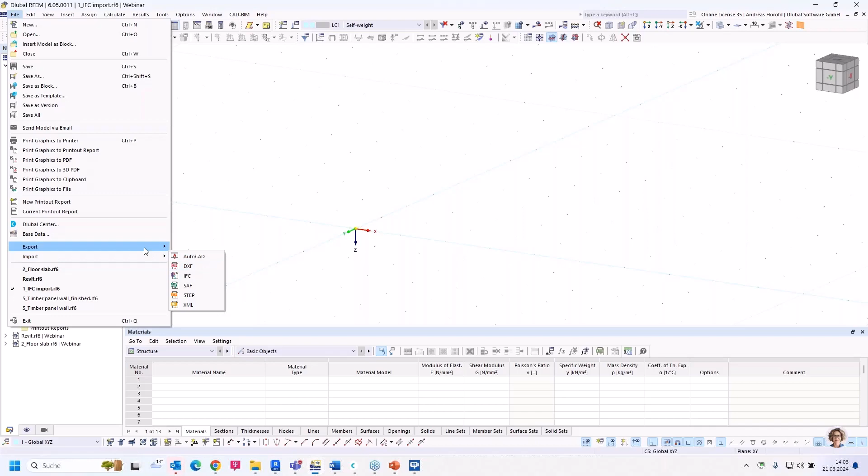Let's turn to RFEM with an empty model. The first question is: how can I export or import an IFC file in RFEM 6 or RSTAB 9? You can do that via File, then Export, where you can see IFC and other interfaces, and similarly File, then Import, also with IFC and other interfaces. Version 4 is supported for both import and export, while the older version 2x3 only works for importing. Regardless of which direction you exchange data, the structural analysis view, the reference view, and the coordination view can all be processed. So let's import an IFC file.

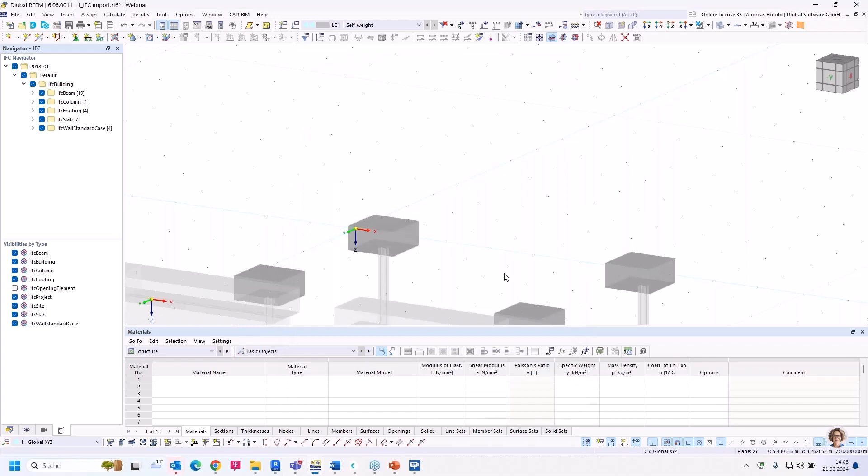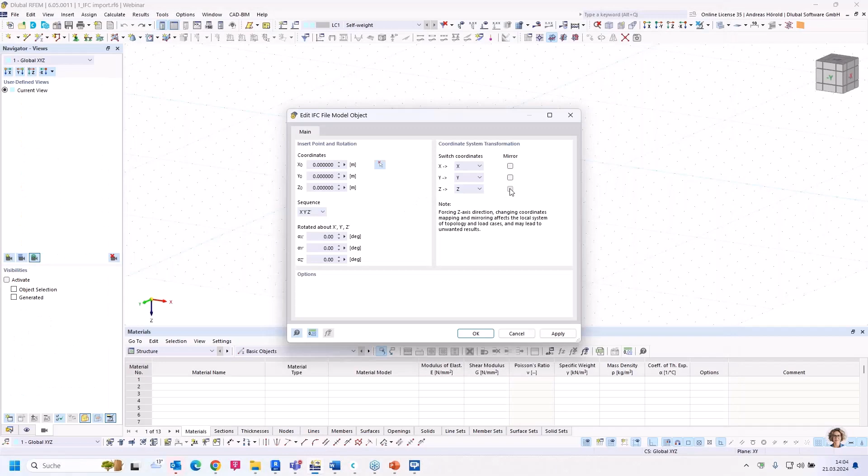So that file. You can choose any coordinates where you'd like to import it, then press OK. You see the import worked, but the z-axis direction was opposite to the CAD model, so let's import again via File, Import, IFC, and this time mirror the z-axis. Okay, that looks much better. Now imagine we have to design the steel construction.

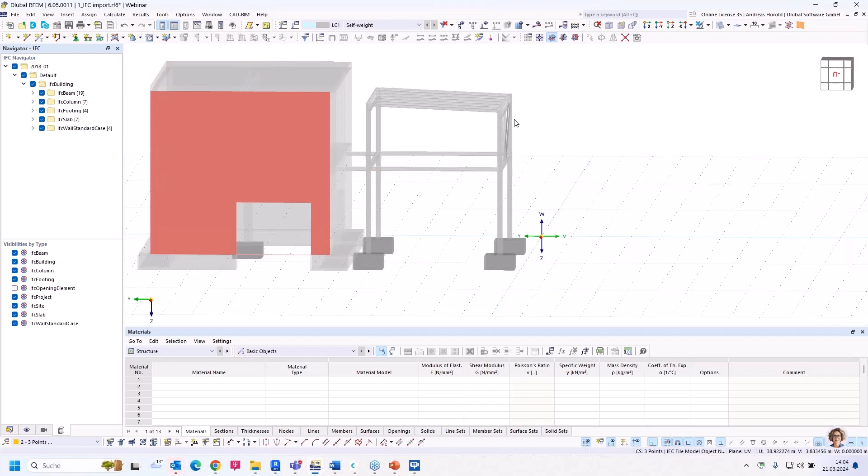We ignore the building here, the concrete structure, and prepare the model for the design. At the moment it's only an IFC model object, so we have to check the CAD-BIM conversion tables. The steel material has to be assigned with the material from the database in RFEM 6, and also the sections — you can see the different cross sections. Most of them I already assigned, matching the correct RFEM section from the library. The concrete items are not of interest for us in this example.

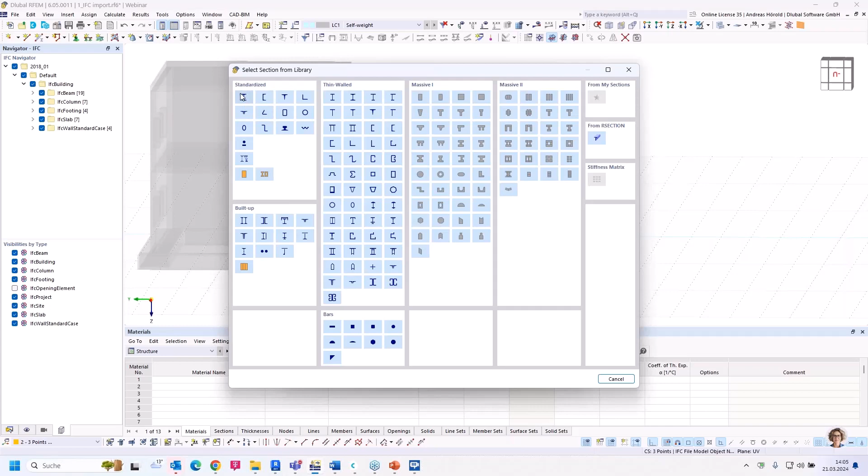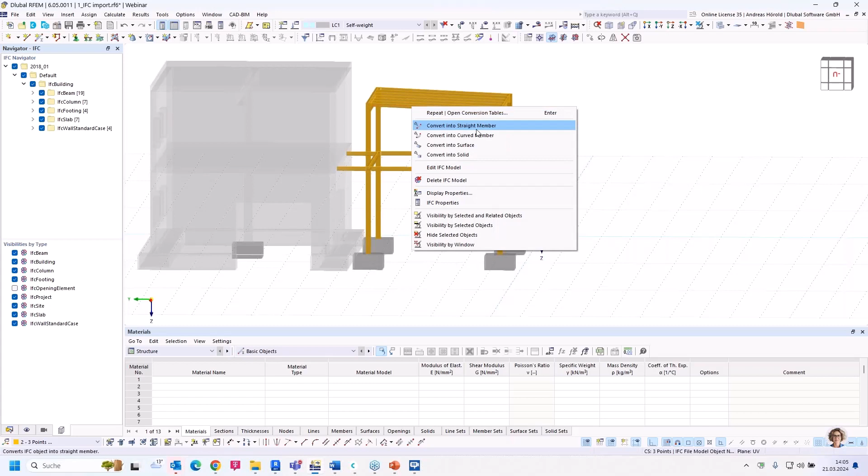Let's assign the HEA 160 from the CAD program — that's a standardized profile. So, HEA 160. Now the list is complete. What we have to do now is select all, and with a right click, convert the whole construction into straight members.

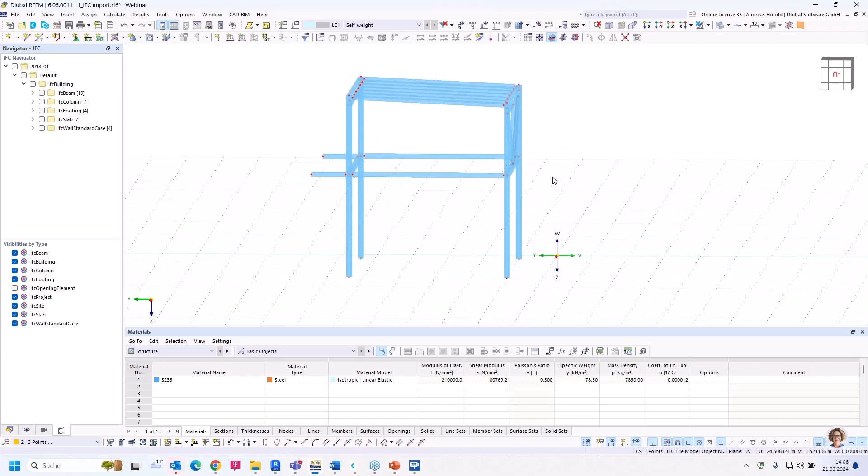Let's disable the other IFC objects here in the navigator on the left side. Now there's only the steel construction, which looks quite good, but only in the transparent or solid model. When we take a closer look in the wireframe model, you can see the members are not connected to each other. Let's turn back to the solid model.

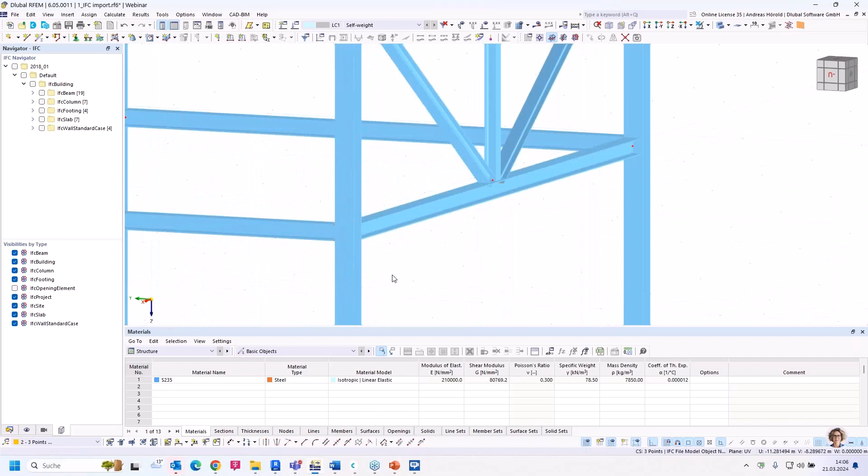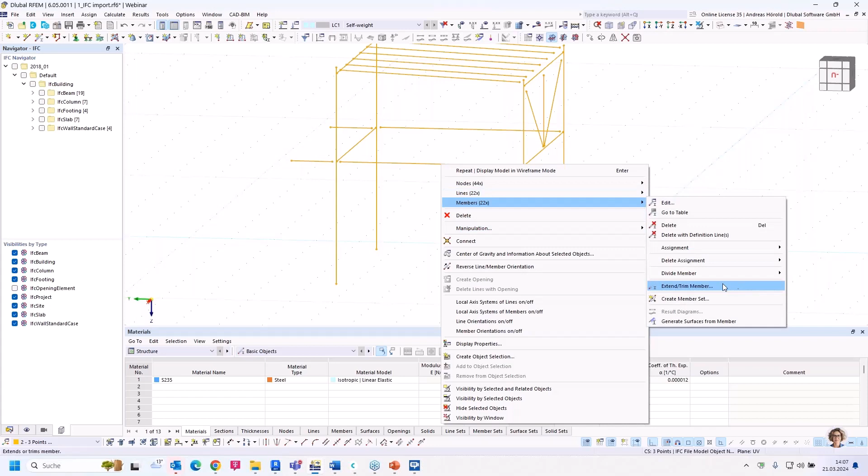In the CAD model, the horizontal beam here is connected with the flange of the column, and so on, but we need the axis of the members, and they need to be connected. Let's turn back to the wireframe model. There's a function in RFEM 6 for correcting such things: I select all, and with a right click, modify the members using the feature Extend/Trim Member. Let's do that — we would like to extend them to the next member or line on both sides.

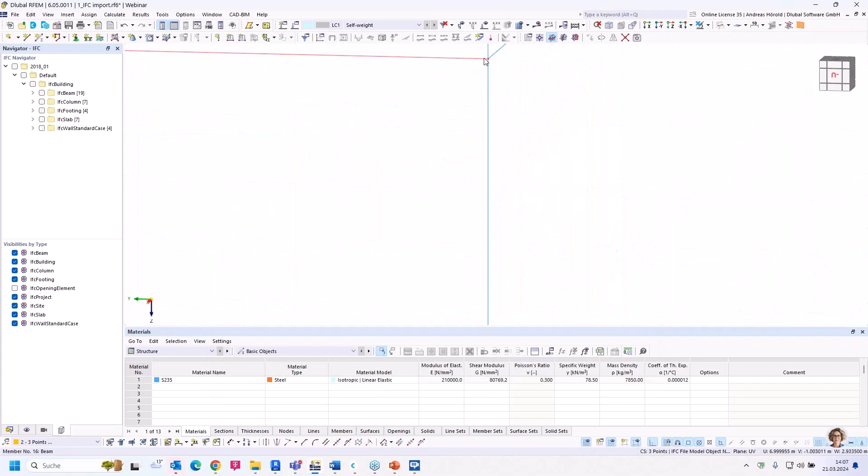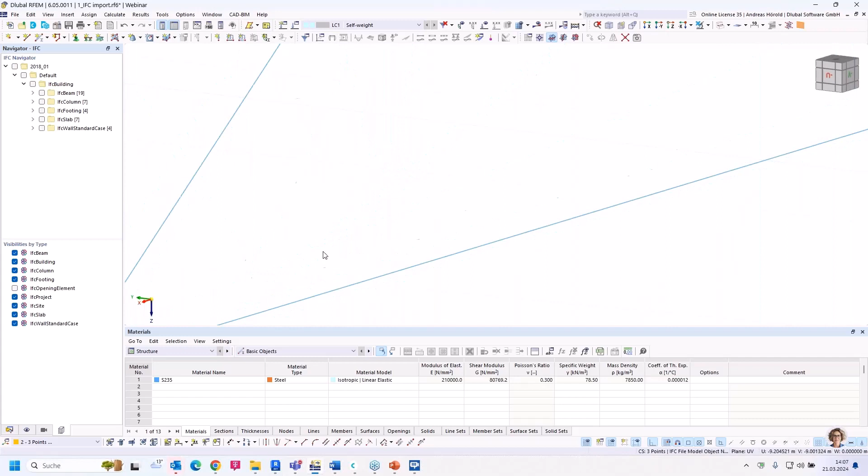Okay, that looks already quite good, at least at this node and the other nodes. But you can see the purlins are not yet connected because we have an offset, though we will correct it. In that case, for the bracings here, we have to do that manually, for example with drag and drop. So here the same.

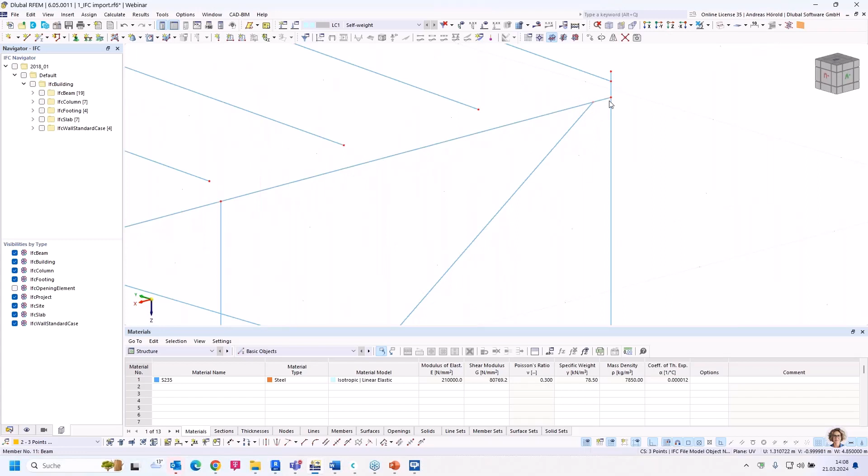Also on this side. Okay, so now we come to the purlins.

I use this function to connect the members or divide them with a node, so I can, for example, delete such a member. But in the first step, we move the roof members to this node with the move copy function, using a vector from this node to this node.

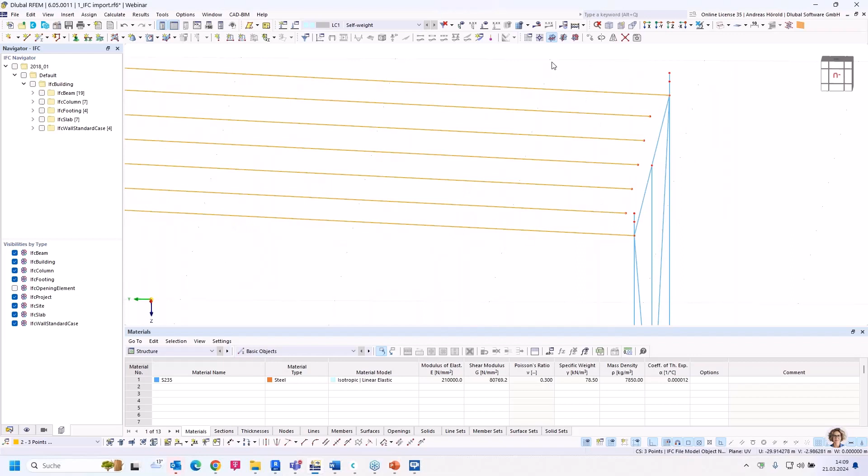Okay, so let's turn to the -y view. I delete these parts of the columns. Also this one.

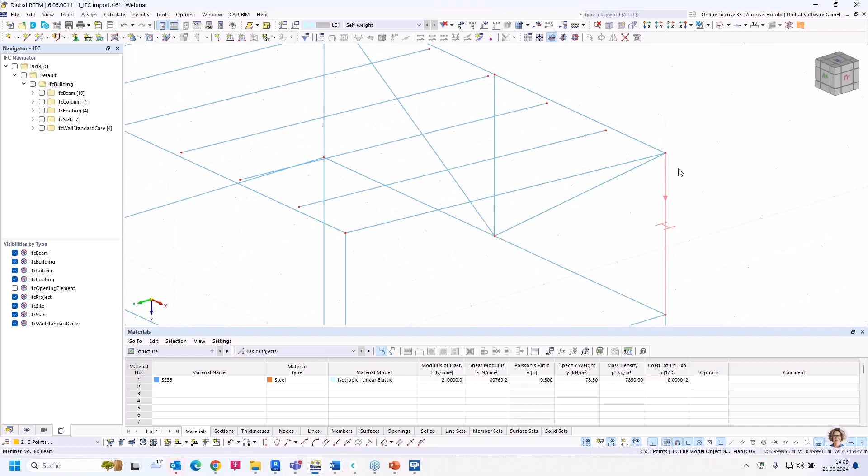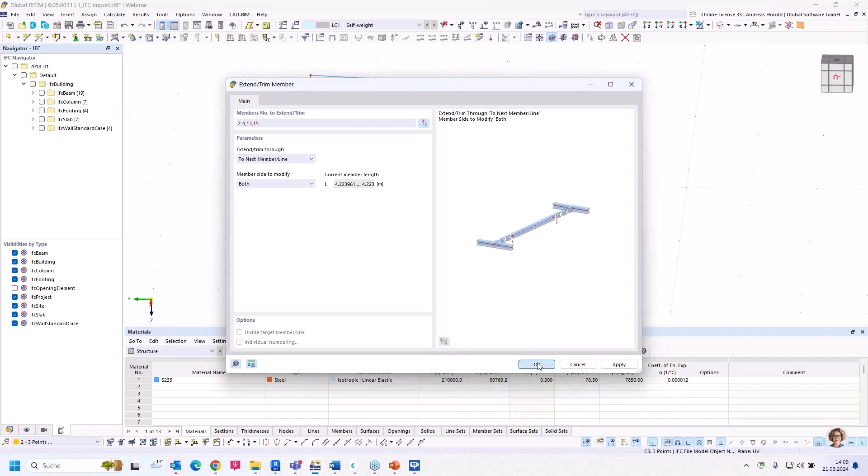So now I need to extend the purlins. I select them, then with a right click, I turn to the already shown feature, extend trim member, to next member line on both sides. Okay, that looks already quite good.

In the first step, I would like to change the bracings here, with a double click, for example, from beam to truss.

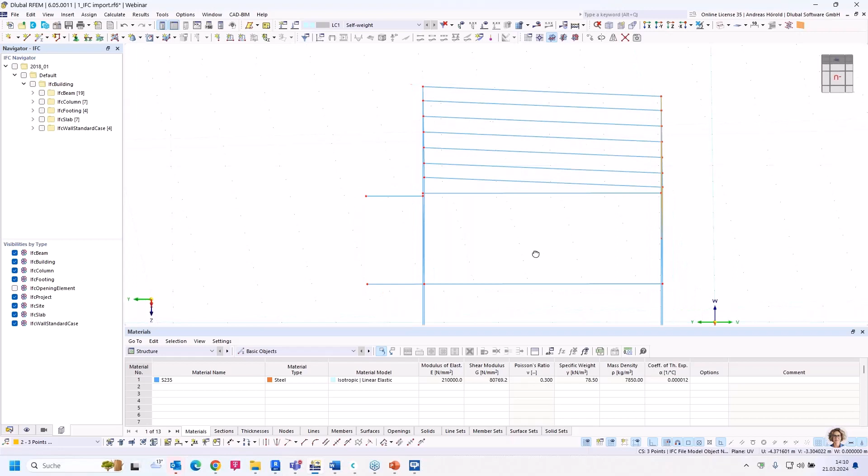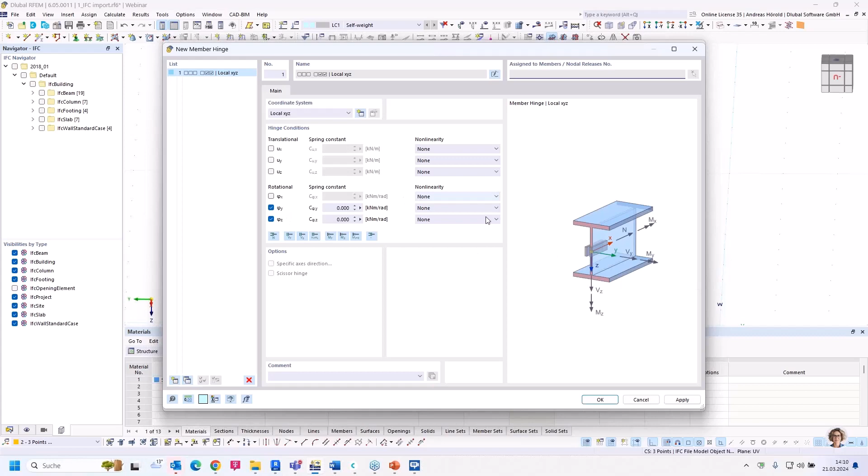So I change the purlins, or I add hinges. With a double click, hinges, I go to the table hinges and create new hinges around the Y and Z axis of the member, a typical moment hinge on both sides.

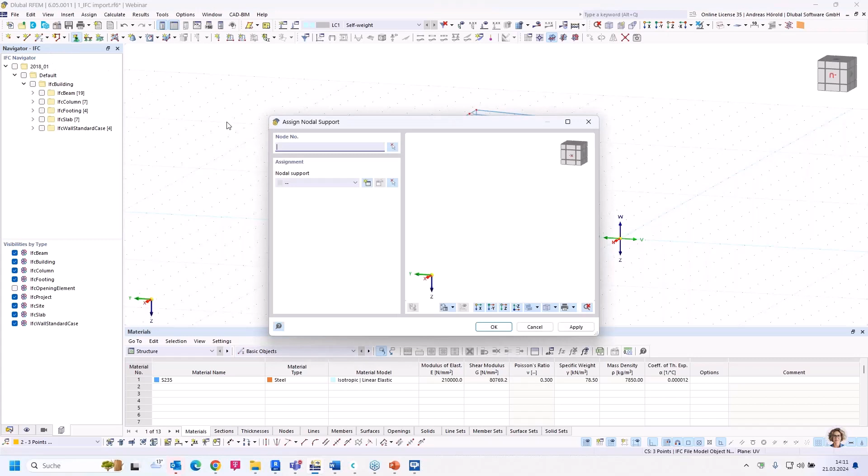Then we need to add supports. So I add supports here, left above, a nodal support in all directions and around the Z axis.

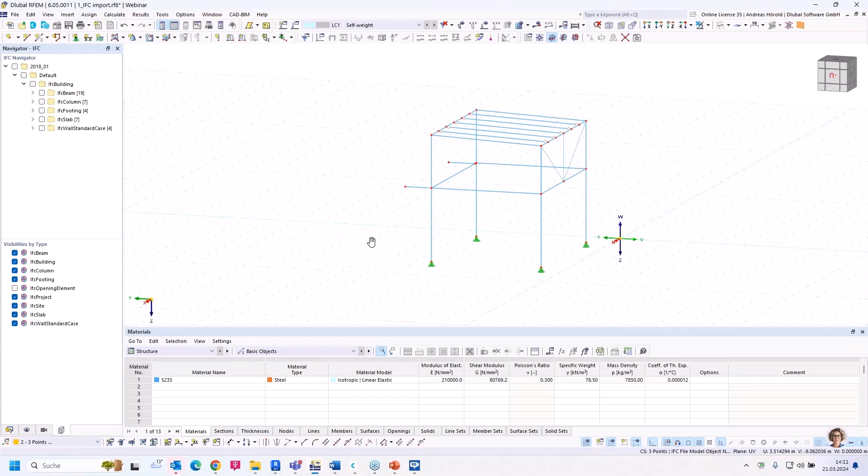And the columns are supported now. And we create also supports on the concrete wall here, so a new nodal support in all directions and around the y-axis.

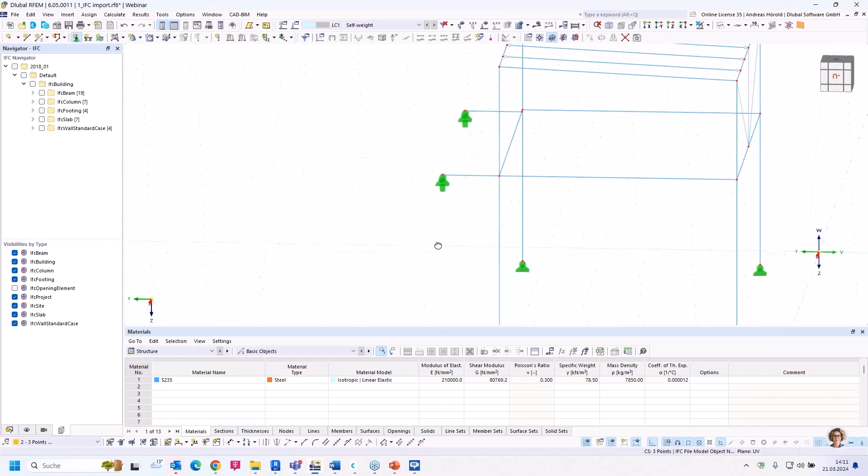Okay, yeah, that should be all. The model is now corrected or modified. We can go to the tools and do a plausibility check.

All is okay, and let's calculate the self-weight load case. Okay, we get results, that means all is connected correctly. And the model can be used, we can assign other loads, snow and so on, and wind, and calculate the structure.

Now you can see it's quite complex to modify such an imported model. It depends how good the model is created in the CAD program. Now there are other possibilities, for example with the direct interfaces from RFEM to Tekla Structures, or to Revit, or from Revit to RFEM.

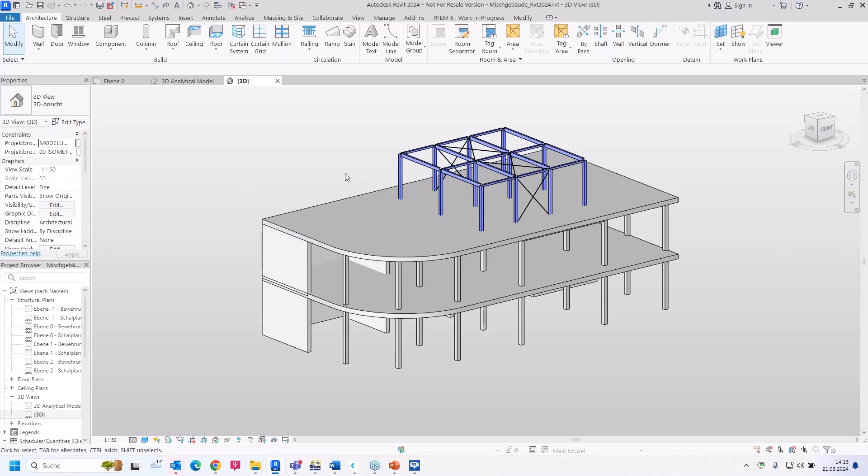Let's show that. I turn to Revit, and if you create a physical model and in parallel an analytical model, you can also create supports and so on. And if you export such a model, you don't need to modify so much as I showed for the IFC model.

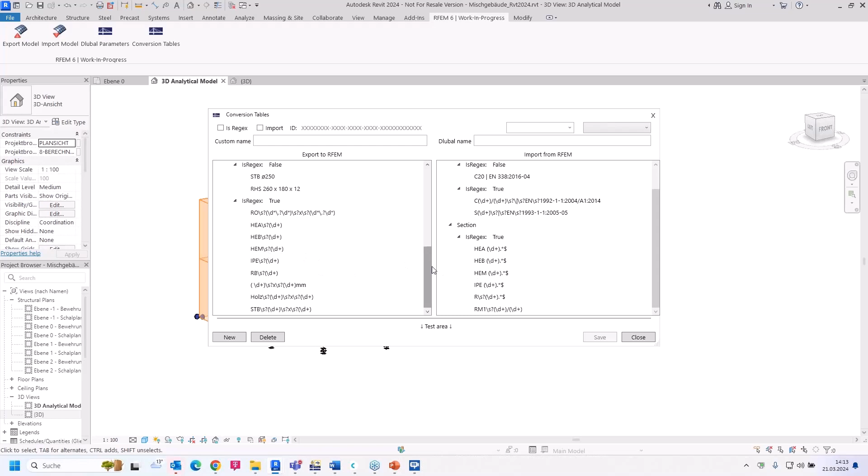Let's do that. We turn to RFEM, the RFEM tab here, or dialog. There are conversion tables, you can also add different cross sections that need to be transferred, and then you can go to the export. You can select if the Z direction is upwards or downwards. You can override the existing structure and so on.

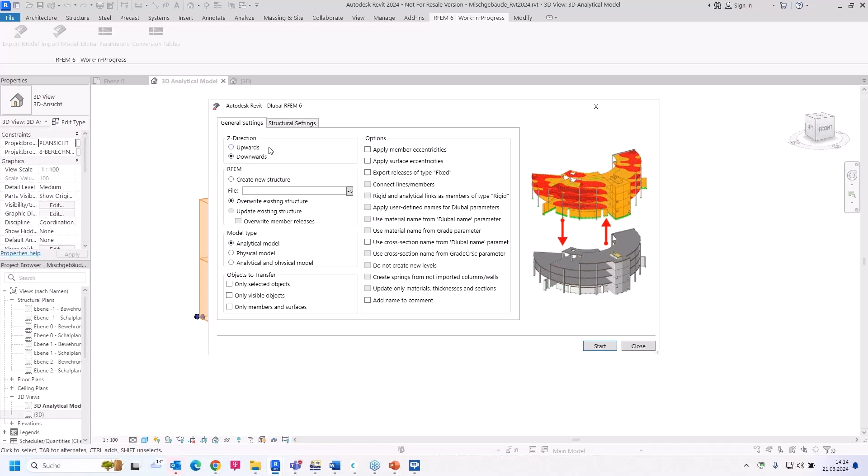You can transfer the analytical model, physical model. You can do structural settings. You can transfer nodal and line supports and so on. I need to go back to RFEM and go to an empty model. It's an empty model, so now I start the transfer.

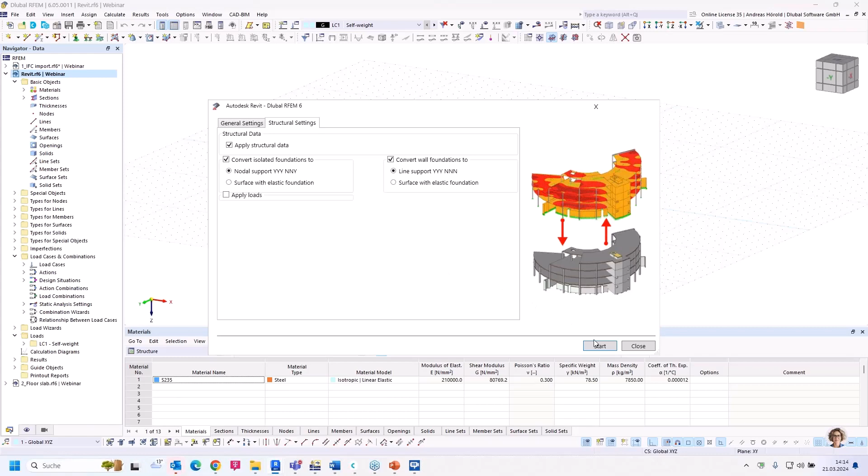Start, okay, now that takes only some seconds. We go back to RFEM, and now you can see the transferred model. That looks quite better. We can turn to the wireframe model. All members are connected and so on.

So let's calculate the model. I create a static analysis setting and calculate the load case, self-weight in that case.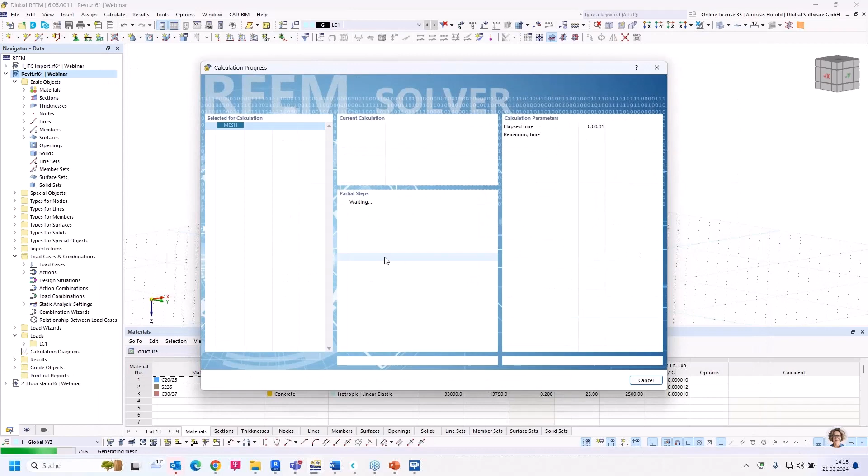So the same workflow is in Tekla, the input is analogous. And as I already said, the better the model is prepared in the CAD program, the less additional work in RFEM is necessary.

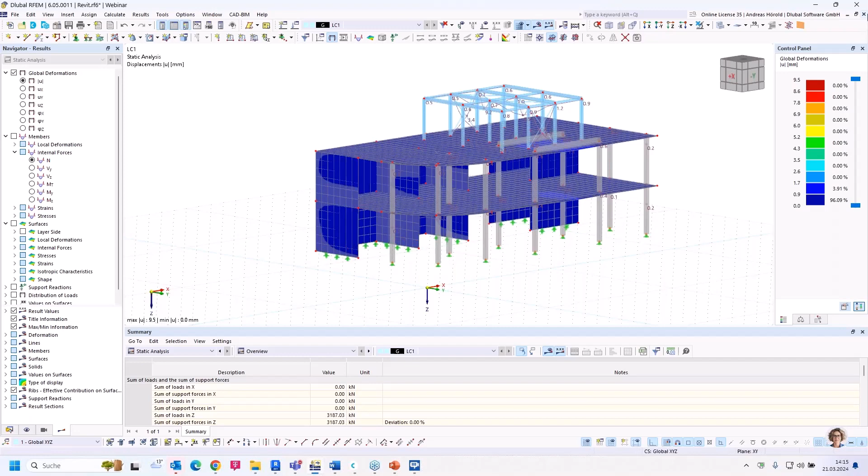Okay, so I close that model, and I save this model. And we turn to the next question.

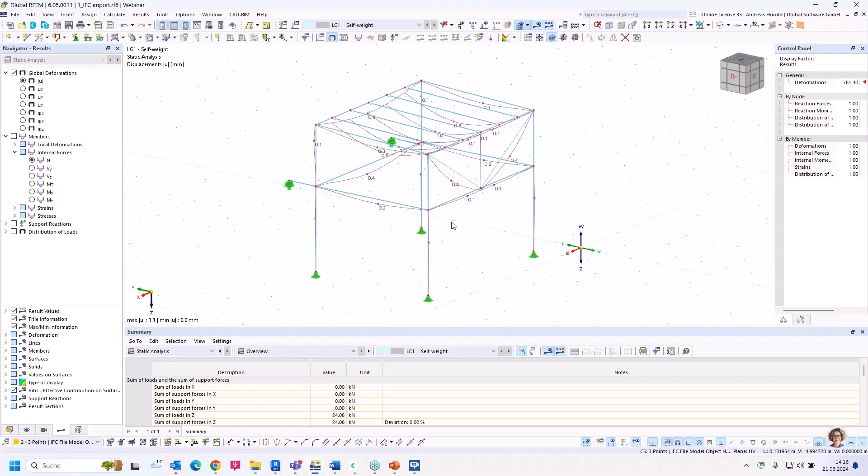The next question is, can I transfer a support load to any location in the target model without defining a node here? Yeah, that is possible. I would like to show you how to do that.

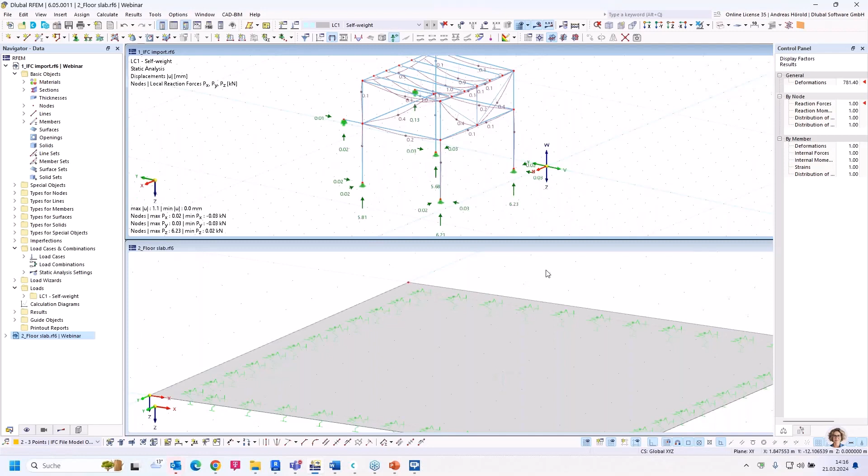I open also the floor slab, or I show both windows. We would like to transfer the support reactions to this floor slab.

Let me switch off the user-defined coordinate system from the CAD model. You can see the steel structure is in the positive Y direction and the floor slab is in the negative Y direction. For the feature I would like to show you, that doesn't matter. Let me rotate it a little bit.

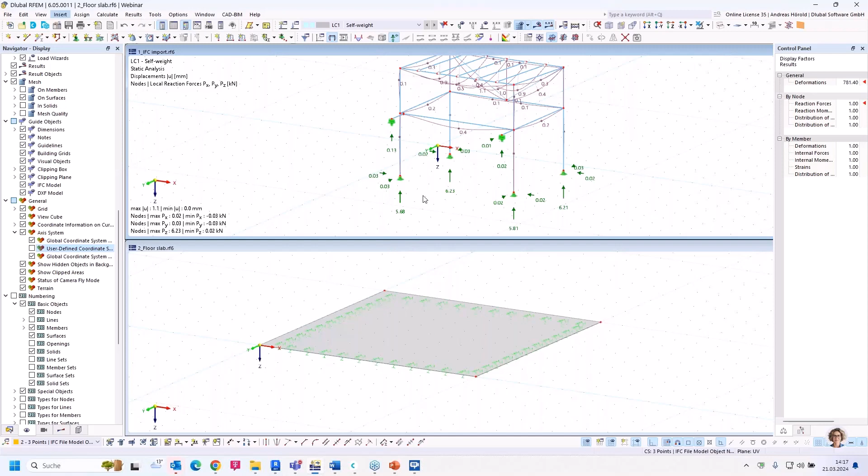We would like to transfer those 4 support reactions to any place of the floor slab. How to do that? We turn left above to insert, but first I must show the numbering of the nodes. That's quite important, and I also add dimensions in the structure.

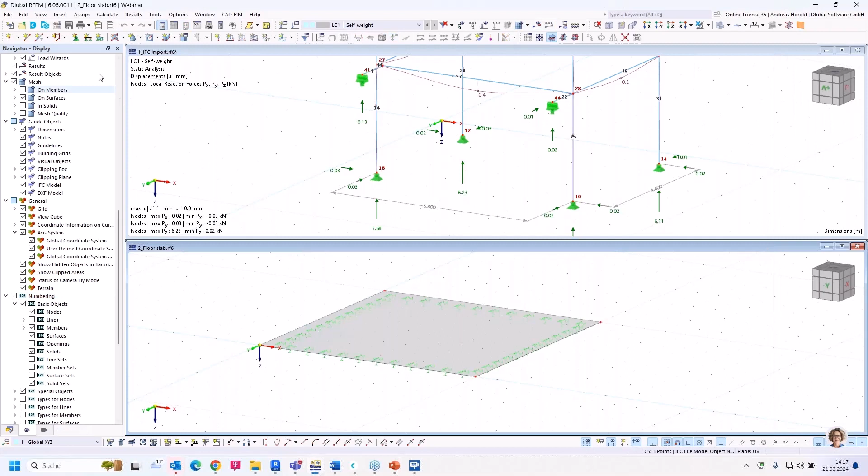So 5.8 meters in X direction and 4.4 meters in Y direction. Then we turn to the floor slab, then insert loads, free concentrated loads.

The feature I show you will be released shortly for free line loads as well. I showed it for the free concentrated loads. I have to select import support reaction, and with this button I define the location of the loads.

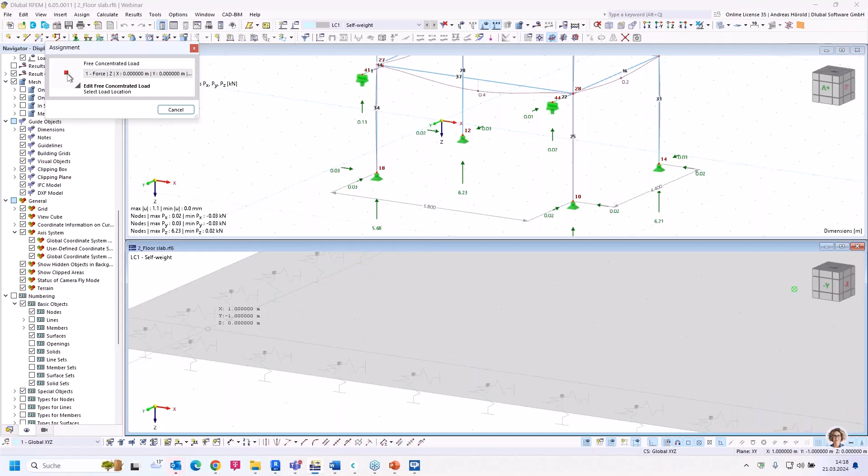So let me select the point, for example this point. I have to define or select the node number. That's the model name, IFC import.

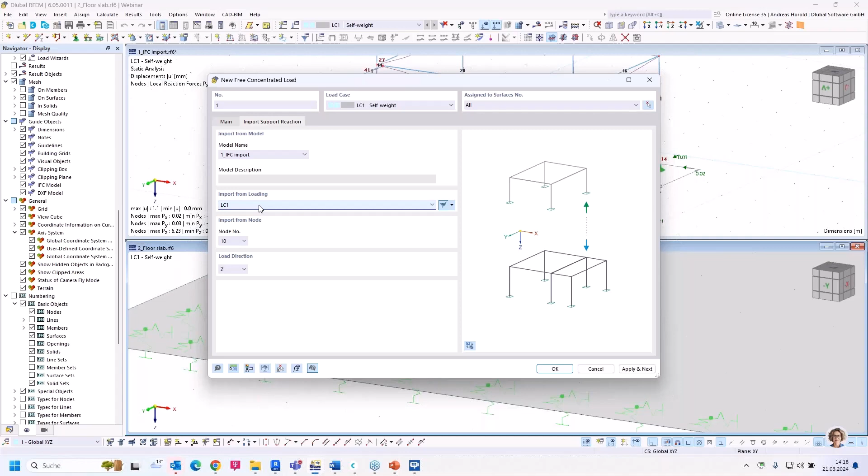It must be in the same folder as the target model. So here you can select the load case and the node. That's node 18. And set direction. That's all for one support reaction.

We need to copy that load, 5.8 meters in X direction. Copy. Okay, and then both loads in Y direction, 0 and minus 4.4.

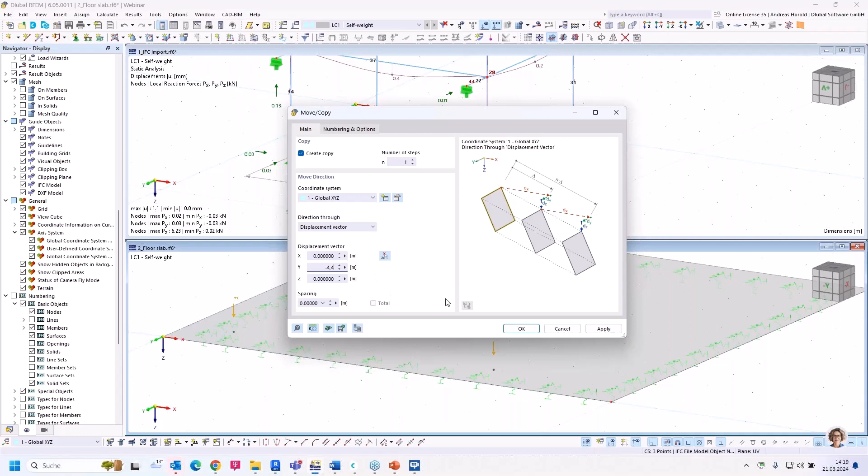Now we have to assign the nodes, node number 10. This one, node number 14. And for this one, node number 12.

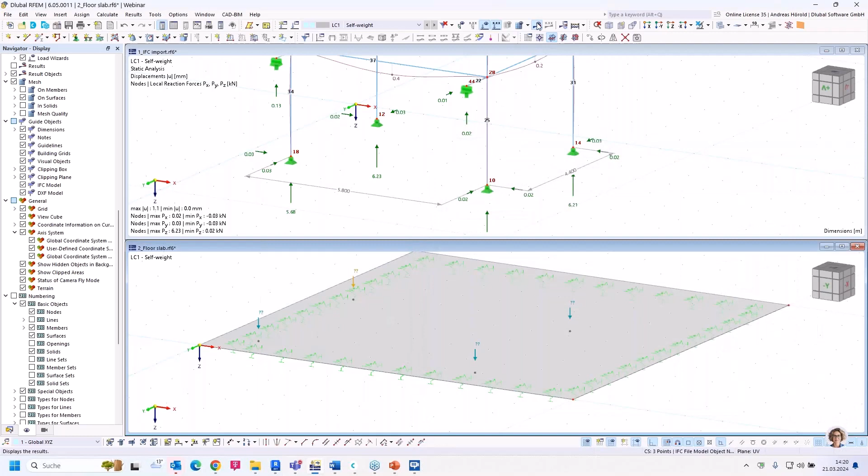So then we need to calculate the load case, and the loads were transferred from the original model to the target model. Takes some seconds.

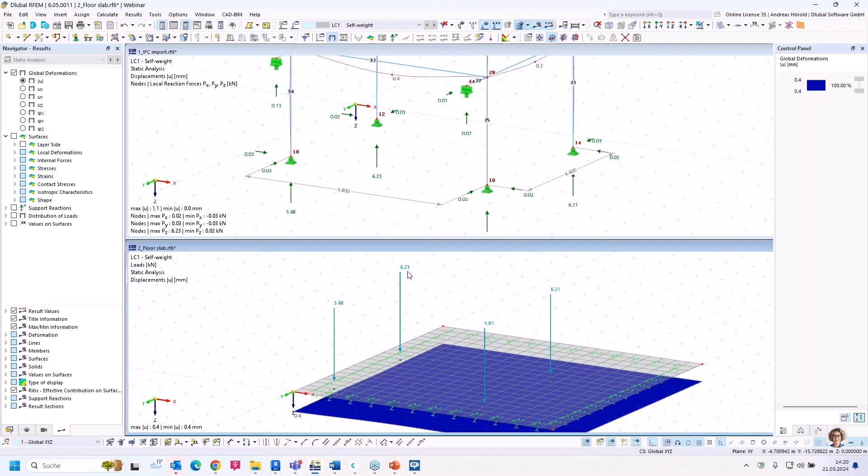Okay, so now let's compare the values. 5.68, 5.68, 6.23, and so on. It matches for all 4 loads.

That's also a little bit complex, but you are absolutely free on the locations in the target models. The other feature I already showed in a previous webinar is insert load wizard, import support reactions, load wizard. With this dialog, you can transfer all supported nodes to the target model.

At the moment, you have to select the single nodes in the target model, but we will implement a feature so you don't need to select any single node. The program should detect where the different supported nodes are, or where the loads from those nodes are transferred into the target model. That's our future plan to improve that feature.

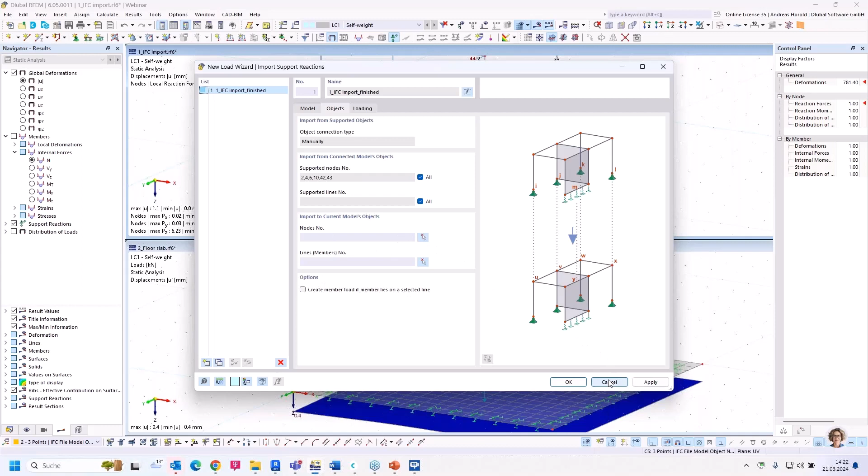Okay, then we turn to the next question. I open the next model. The next question is: are offset moments that occur when notching cross-sections considered in the design? Yeah, the answer is yes.

I would like to show you that on an example. You can see 2 single-span beams. I turn to the solid model, and you can see notches here at the start and end point.

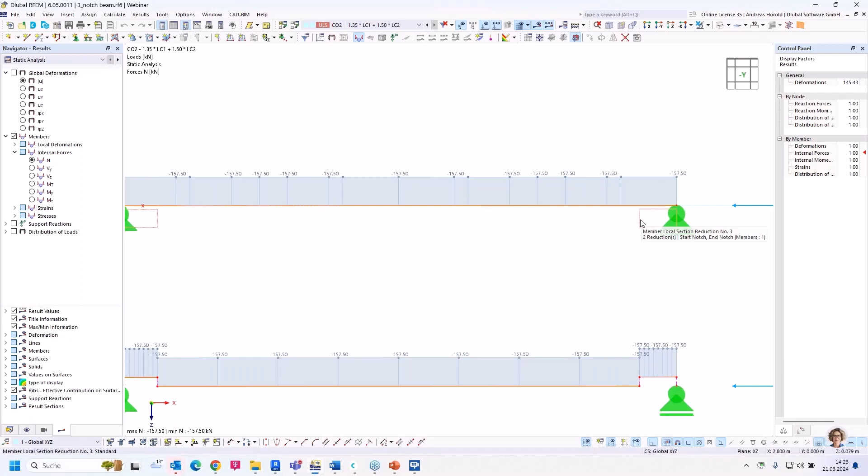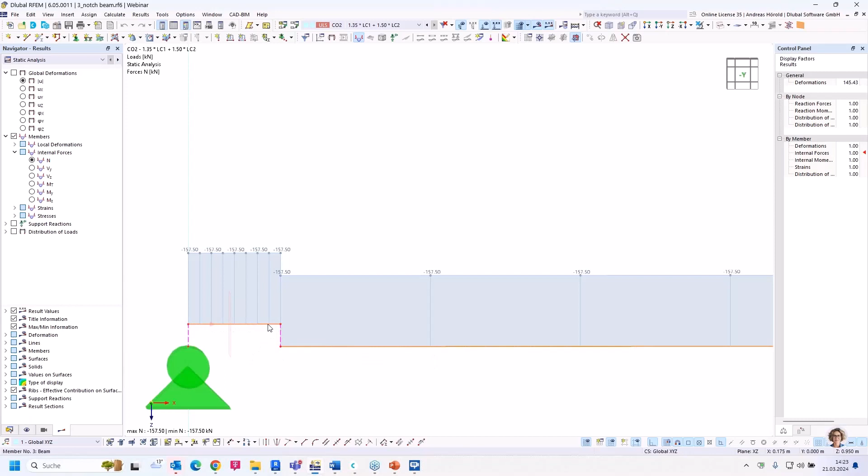For the upper model, I defined that with a design property, and for this one I created different cross sections. Cross section with a height of 140 millimeters, and on this place 240 millimeters, and that's the notch. The axis of the member is higher than this one without the notch.

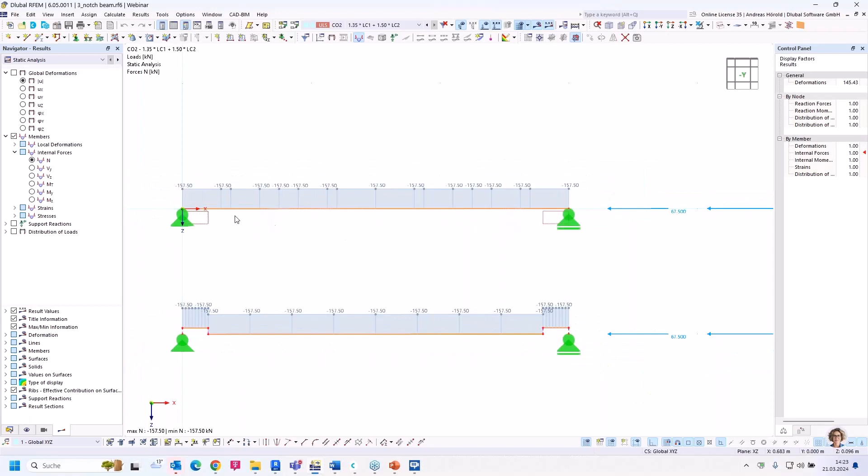You can see the internal forces are the same in both models, at least the normal forces. But for the MY internal forces, you can see there's an offset moment in this model, but not in the upper model.

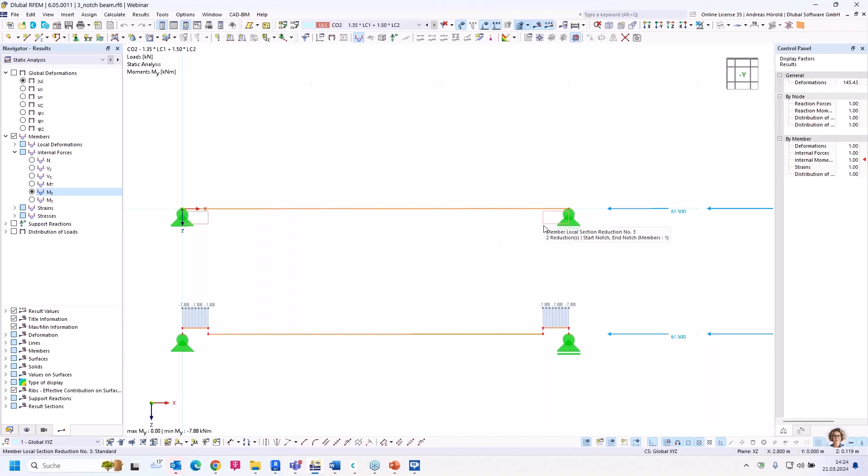But I created design properties for this member, and later it will be considered in the design, this offset moment. So I show you the properties of the member with a double click, go to the design types, and you can see where our local section reductions are created.

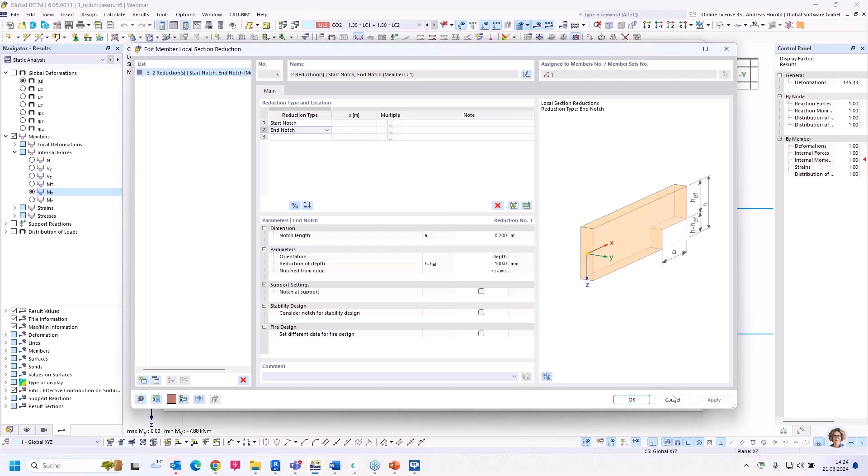So at the start, we have such a notch with a length of 20 centimeters and a depth of 100 millimeters, and the same at the end of the member. I simulated the same notch with this model.

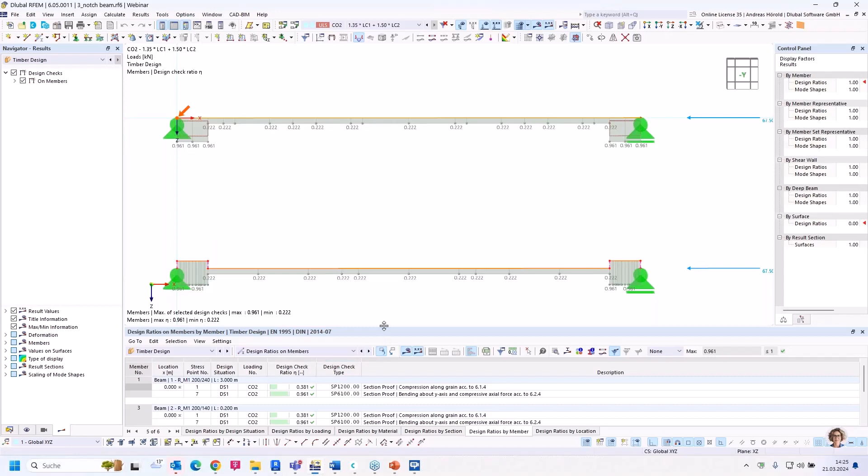Those are rigid members. Let's go to the design, to the timber design. So I go to the design ratio by member. You can see all the design ratios are the same in both models.

0.22, 0.22, and at the end and at the start

Okay, that's member number 1 in the table. I double click on that line.

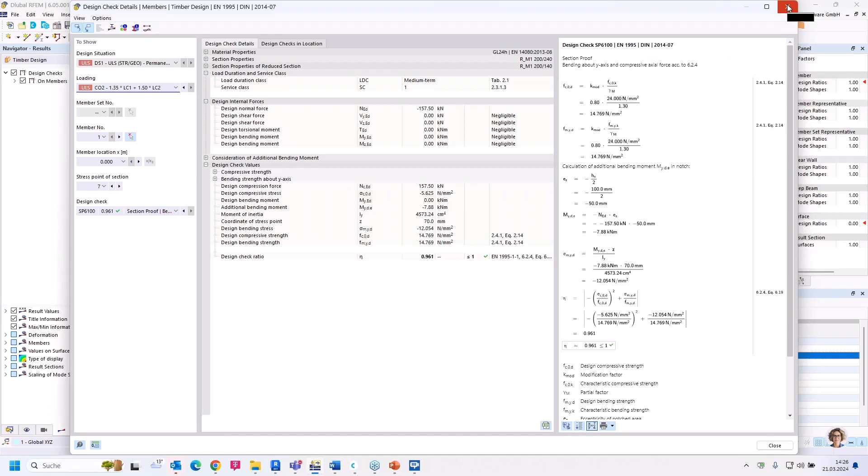You can see in the design checks that the calculation of additional bending moment is considered, the normal force with the eccentricity because of the notch. That's the answer to the question: yes, the offset moments were considered in the design.

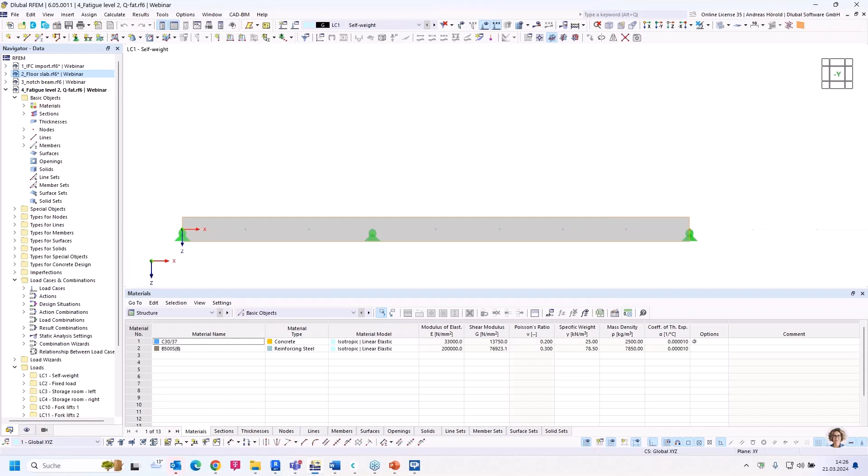Okay, then we turn to the next model and the next question: how do I consider the Q-FAT value for level 2 fatigue design for concrete components?

That's a simple model, a 2-field concrete beam with different load cases: self-weight, fixed load, storage room load left and right, and forklift loads on different places. We simulated such a moving load. Let's turn to the load cases and combinations.

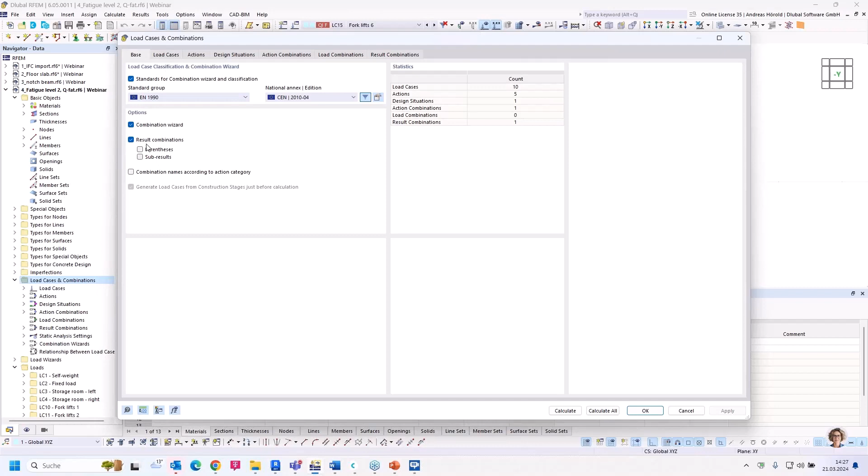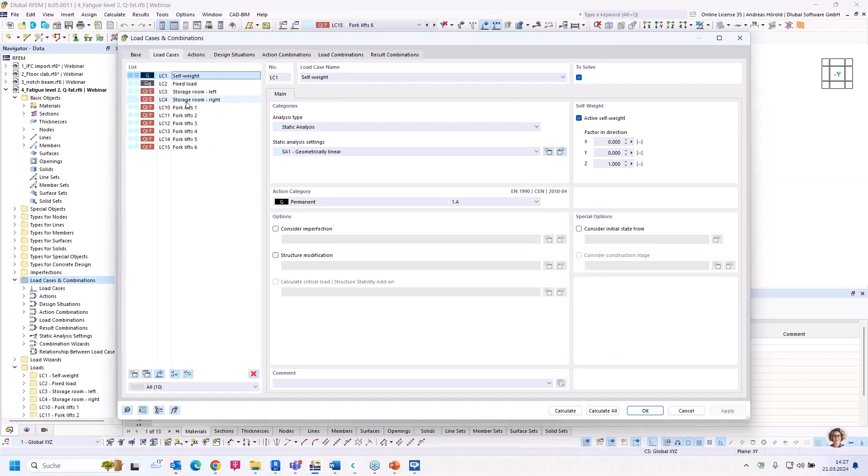We created result combinations, then the load cases, and for the forklifts I selected in the additional settings to consider them as fatigue load for all forklift loads and not for the others. The fatigue effect is generated in the actions as soon as a load case has been given that option. You can see the fatigue action.

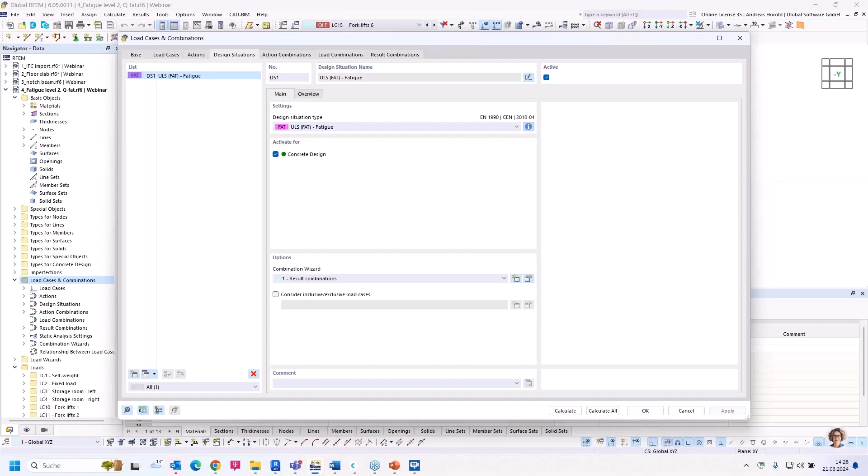Then let's turn to the design situations. We have one design situation: ultimate limit state, FAT, fatigue. The result combination is selected. At the moment it only works via result combinations. You can see the forklift load case 10, or load case 15, and if we click on the info button you can see the fatigue loads are considered one time.

Okay, that's all to this question.

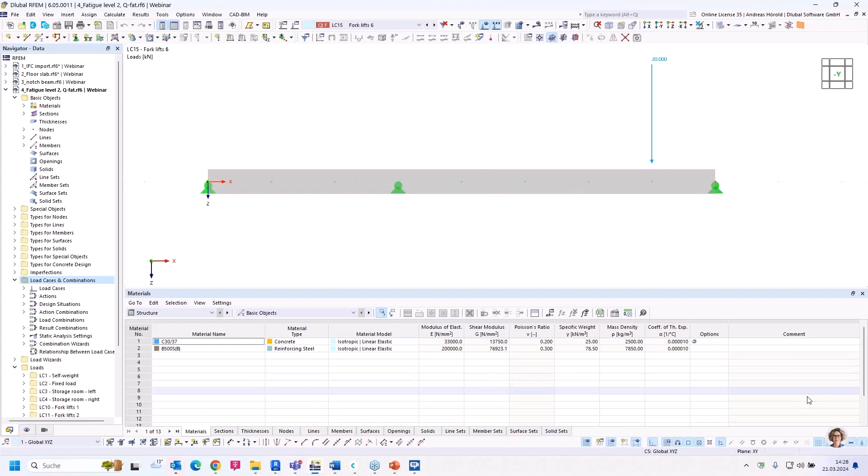The next question is: what is the purpose of the artificial intelligence assistant MIA in the program interfaces of RFEM and RSTAB? You can see it on the right side at the bottom, the MIA.

If I click on it, I can select or enter a question here. The reason is 24/7 help with the program, so you can ask MIA anytime, in the evening, in the early morning, or at the weekend, and so on — you get help anytime.

You can move the MIA in any direction or to another screen. You can also switch off the enter dialog here with that button.

Let's enter a question here, a typical question: what can I do if RFEM reports an instability in the structure during the calculation?

When you enter such a question, it will connect to the website, and MIA searches the Dlubal website, the FAQs, the product features, or the knowledge base library for an answer, and gives you the answer, for example, for this question. And you can do that, as I mentioned, anytime.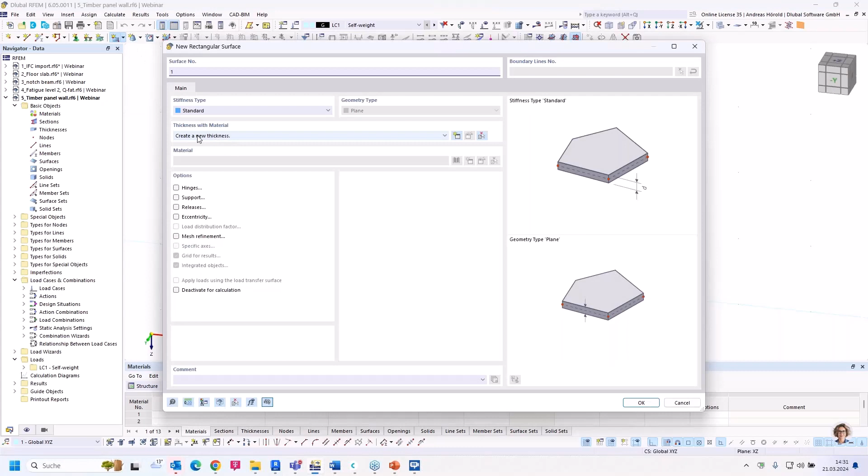I create a new rectangular surface and I have to create a new thickness. The new thickness type is beam panel, and with that beam panel you can create a timber panel wall, for example. You can see that in the preview.

Let's fill out the different dialogues. We have to select the material. I turn to the library, timber, then an OSB sheet with a thickness of 18 to 25 millimeters.

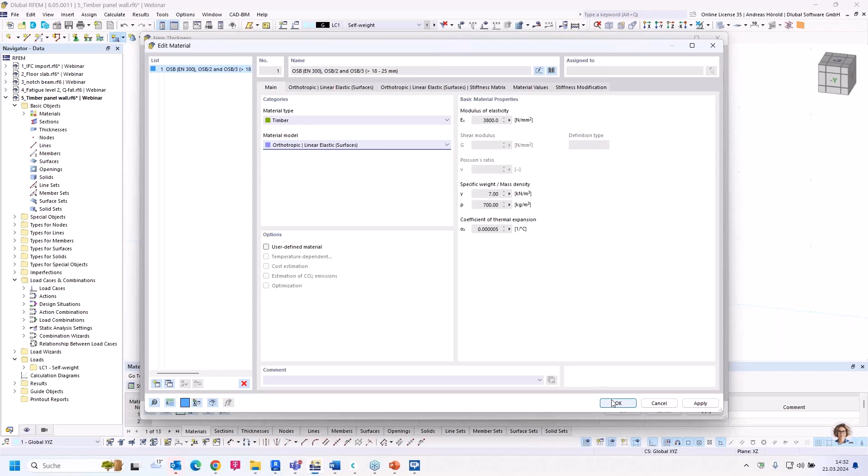My sheet should have a depth or thickness of 19 millimeters, but we have to select another material model, an orthotropic linear elastic material model. Let's enter the thickness, 19 millimeters. For the sheeting on the back side, the same sheet, an OSB sheet with a thickness of 19 millimeters.

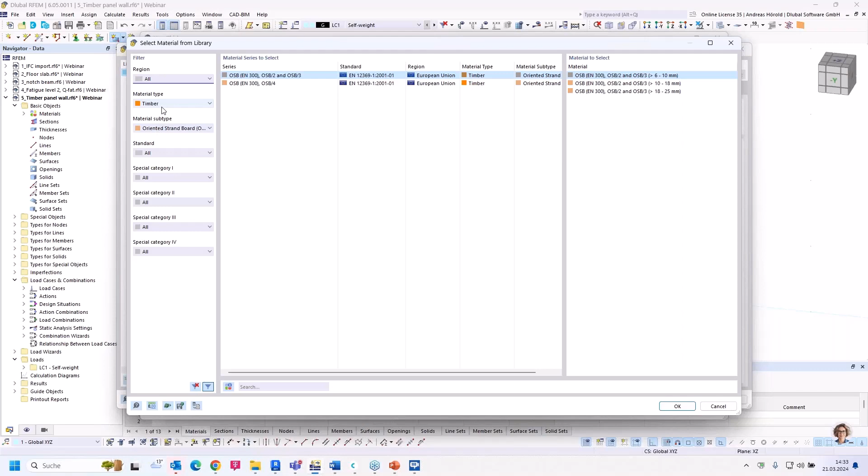Then the framing members, the horizontal members and the vertical members at the outside here. For the section we have to define a massive section with, of course, another material, not OSB but timber and solid timber. I choose Eurocode and then softwood C24.

Okay, I have to enter the parameters, 60 millimeters and a height of 180 millimeters.

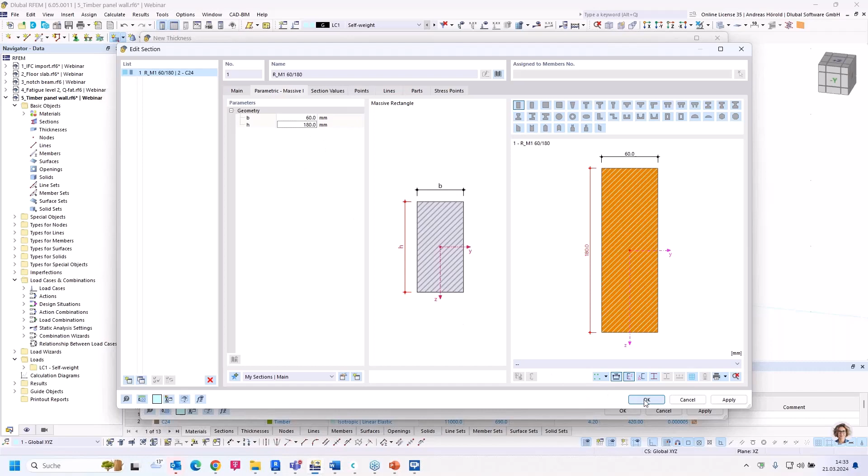Then you have to select the connection type: nail, staple, or user-defined. In my example, I choose nail. Then I enter the connector dimension.

6 millimeters, and a spacing of 100 millimeters. The connector stiffness is calculated automatically.

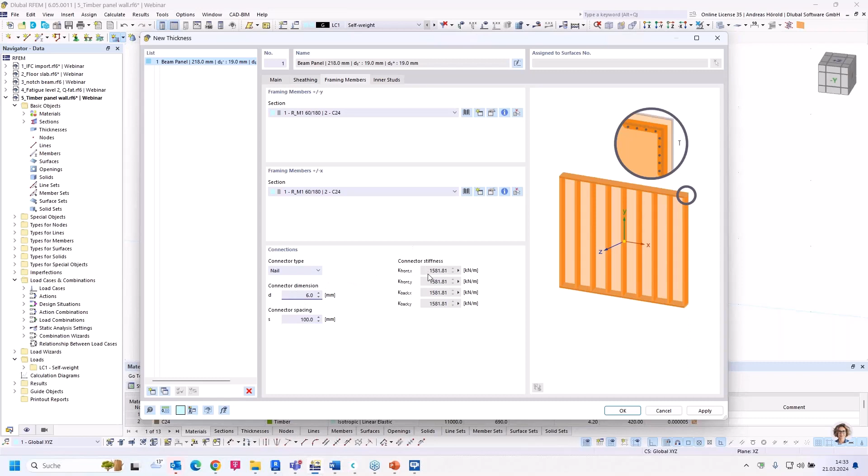Let's turn to the last dialog here, the inner studs. I choose the same section, 60 by 180 millimeters.

The distribution should be entered as center to center, gap, uniform, or user defined. I think center to center is the most common entry.

I have to select the spacing. A typical spacing of the OSB sheets is 62.5 centimeters.

Then I also have to choose the connector type, also nail in that case, 6 millimeters and a spacing of 100 millimeters. Okay, that's all.

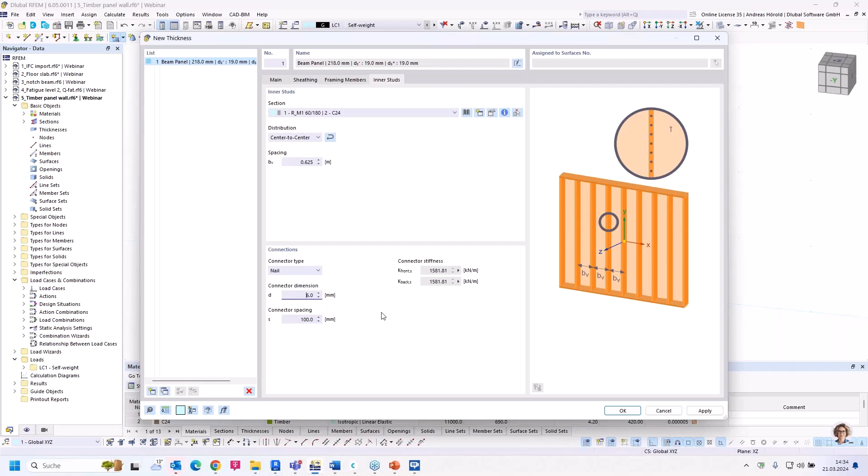I have to select the dimensions, for example 5 meters width and a height of 3 meters. And you can see the wall.

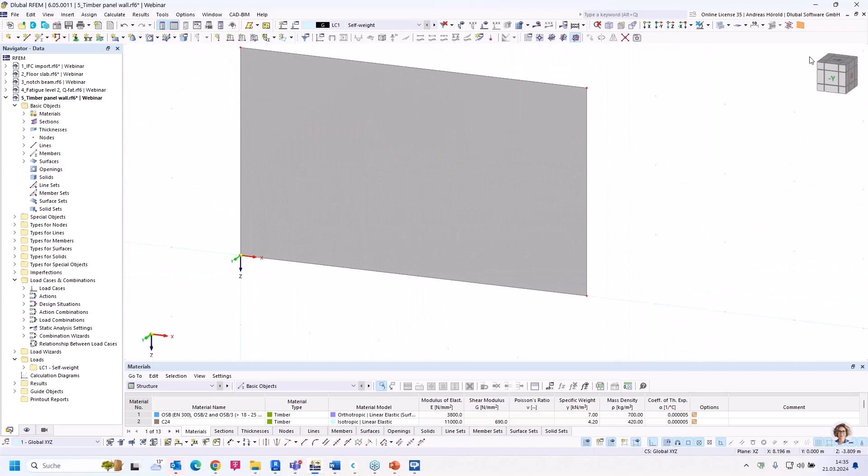With that button right above, you can display the beam panel, and now you can see the submodel. You can see the sheets on the outside.

Then the beams with hinges, but it's quite stiff in the direction of the wall. Let's check that.

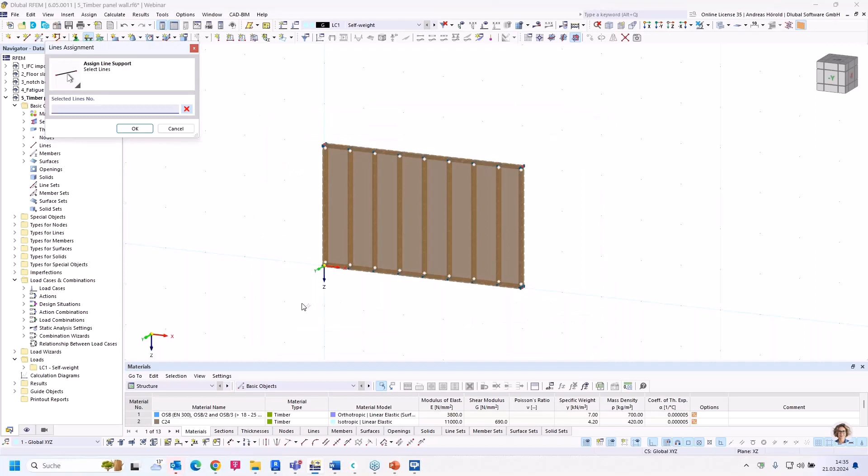I enter, left above here, line supports. I select the line. Then I create a new line support in all directions.

And for the upper lines, I select another line support, a new line support, only in Y direction.

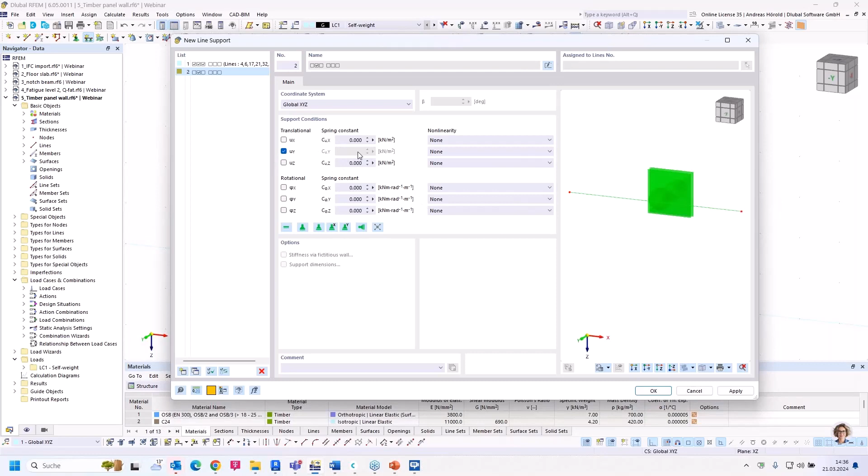In Y direction, so that the wall doesn't fall down to one side, for example. And I select these lines.

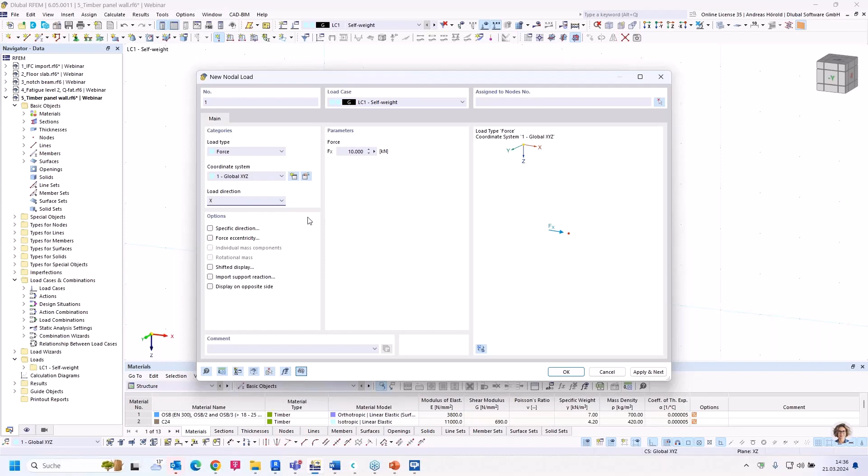So then I enter a load, a new nodal load, for example 10 kilonewton in X direction.

In that node. Okay, and let's calculate it.

Let's check the deformations. 0.4 millimeters. I can see that it's a quite stiff construction.

Okay, that should be all for today's questions, or the questions that our customers asked last time.

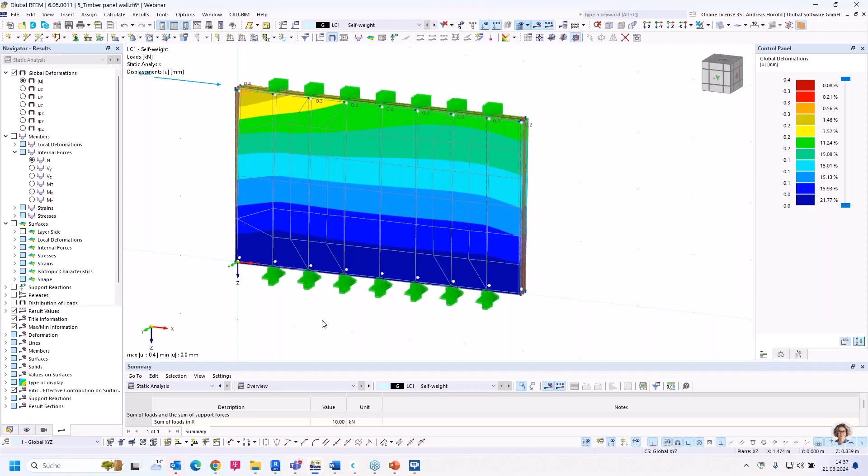I would like to show you where you can find the recording of this webinar and the models. We uploaded the models there. But before I do that, I would like to go back to the PowerPoint.